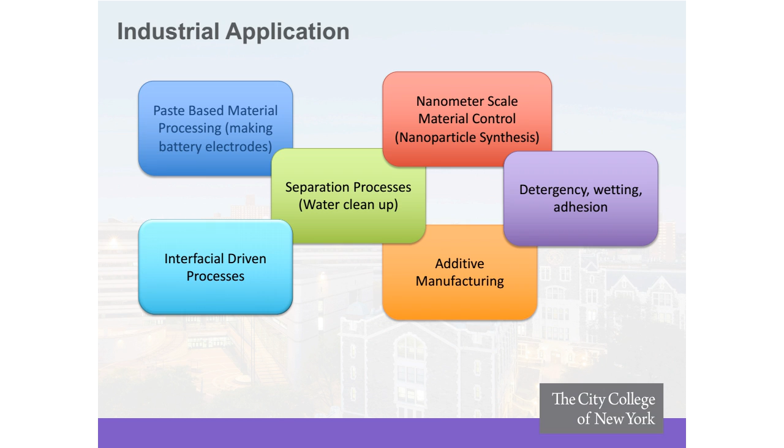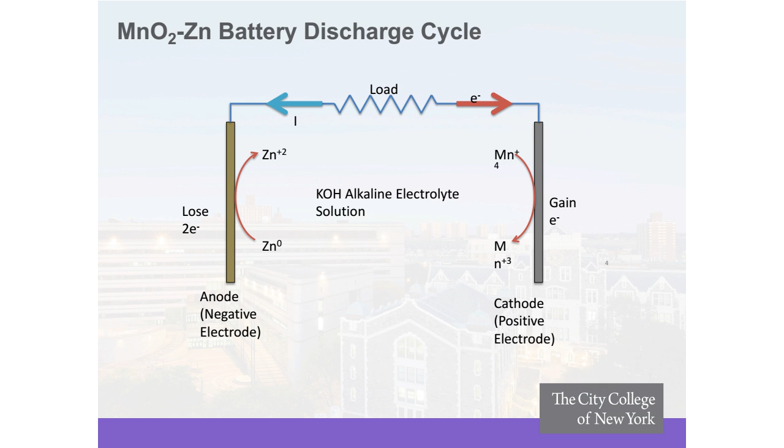In the first example that I've mentioned, we are focusing on batteries that are using the chemistry of the manganese dioxide zinc metal anode. In these cases, I'll focus exclusively on the anode for the purposes of this presentation. We basically have metallic zinc that upon discharge actually corrodes, oxidizes from Zn0 to Zn2+, and the Zn2+ species are actually soluble in the alkaline electrolyte that we use.

During charging, these species actually replate onto the anode by accepting 2 electrons, and they form metallic zinc again. These processes, while they appear to be very simple, are actually complex in the sense that we do not know what intermediate species adsorb on the metallic surface. We also do not know what the rate limiting steps for these processes are.

And at the same time, on the actual anode, there are other competing reactions, such as the electrolysis of water that generates actual hydrogen during this process. And so, in order for us to be able to increase the efficiency of the battery, we need to minimize the parasitic reactions, the electrolysis of water, while figuring out how to overcome kinetic or mass transport limitations during the charge and discharge of the zinc anode during the battery operation.

If one were to focus on the particulate nature of the zinc anode, one will understand that the zinc particles, as they undergo corrosion, actually only their surfaces corrode. And very much as a core shell model, the oxide surface increases in size and eventually dissolves in the electrolyte.

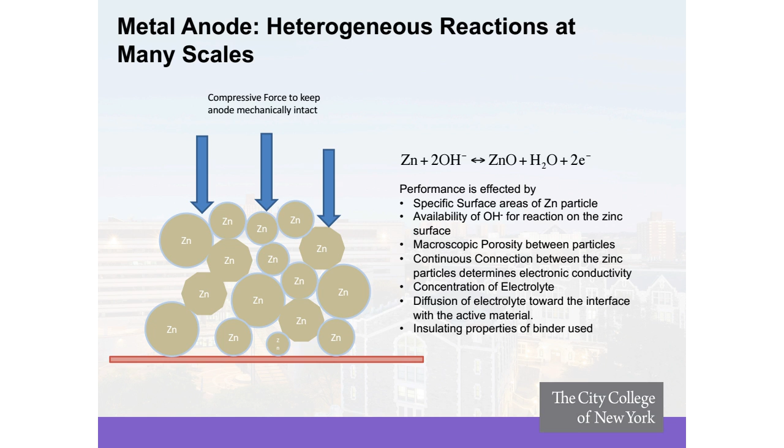Our motivation, thus, for this field is to actually build inks or materials that are representative of anodes or of the cathode material or even the electrolyte and the actual separator, and use 3D printing to allow us to print architectures of batteries where we've maximized the area to volume ratio so we can increase the power generation during the discharge of these batteries, and at the same time mitigate any type of transport problems that occur during the operation of these batteries. Furthermore, this allows for a much easier way to build batteries in unconventional environments.

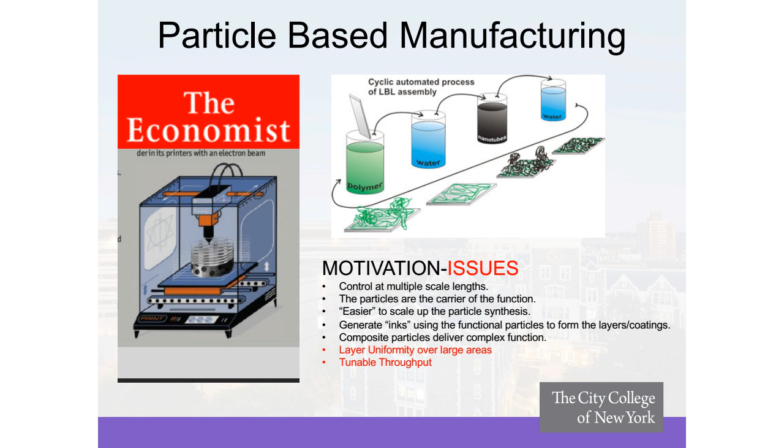Another area of interest in my research lab deals with the templating synthesis of materials and looking at different templating mechanisms. Specifically, we're interested in being able to use soft templates, such as liposomes or vesicles, where we can introduce these organic self-assembled structures to inorganic materials and synthesize using these organic layers as a template.

Such a particular example allows us to use a transcriptive synthesis where the vesicular or liposomal structure is used as a template to grow on the outside of that surface a very thin layer of a metal oxide, such as silica, and so we can generate hollow spheres.

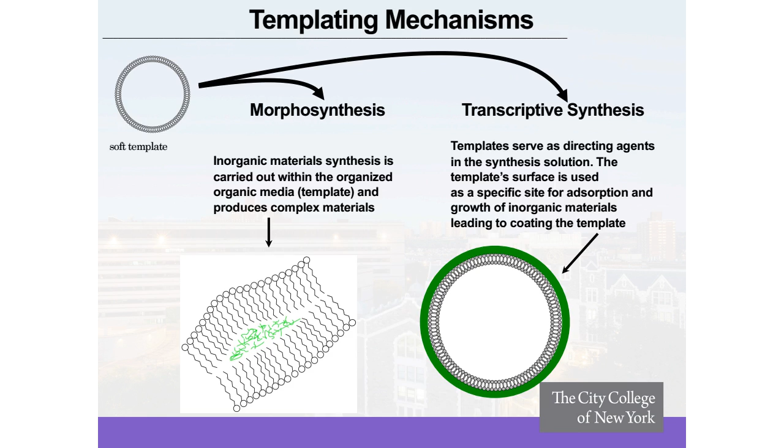By controlling the porosity of the shell, we can now have a scalable way of synthesizing hollow silica particles or other metal oxides, and we can control the exchange rate between the inner and outer domains by controlling the number density of the pores and the size of these pores. These pores again are templated by the presence of polymer chains that are incorporated in the actual vesicle wall.

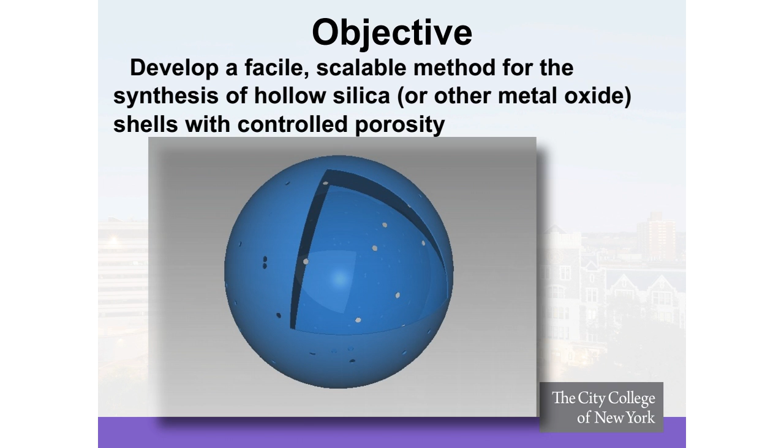Once these particles are formed, they can be assembled through a colloidal assembly process into thin films, forming colloidal crystals or basically colloidal membranes. The porosity through these membranes is controlled by the pore size of each one of these particles, which allows the diffusion or permeation of a gas or another species of preference through that material. Furthermore, we can functionalize the surfaces and the pore surface in such a way that we can also chromatographically separate out materials as they permeate through these colloidal crystal assemblies.

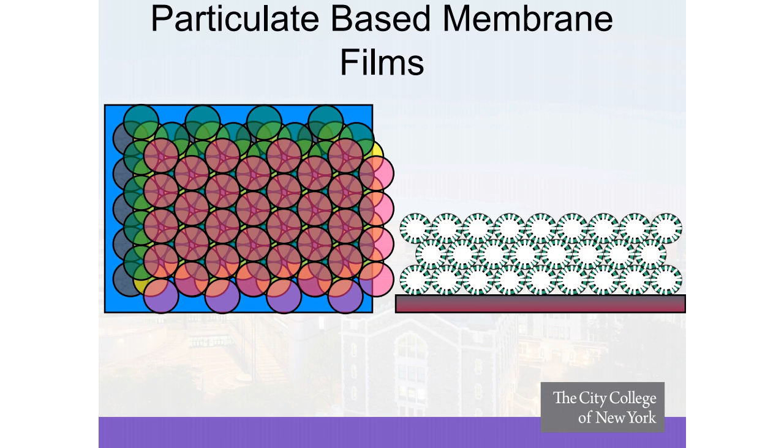Another approach where we can utilize wetting phenomena or selective interfacial interactions between a liquid or two liquids and a solid substrate is for the separation of oil and water using meshes that have antagonistic wetting properties. So, for example, if we have a mesh that is wettable by a water phase but not by an oil phase, then only the water droplets are going to be able to move through the mesh pore while the oil droplets will be captured, and one is able to phase separate water from oil quite efficiently.

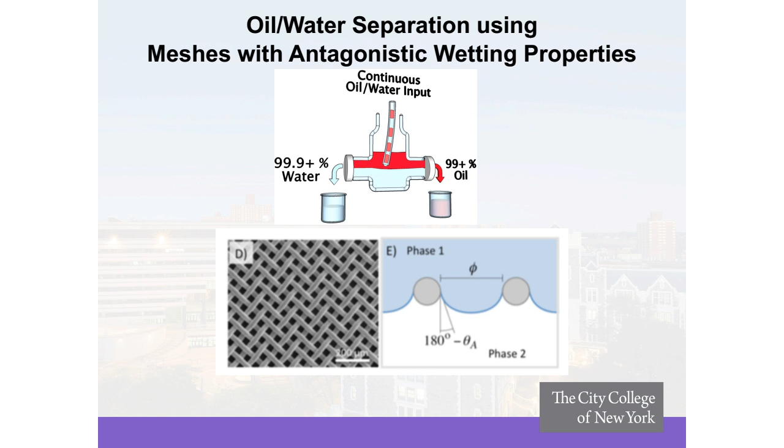Furthermore, the porosity and wettability of these surfaces is determined really by the microstructure on the metallic substrates or the actual substrates of the separator. So controlling that microstructure allows us to have surfaces that are either wettable by water or wettable by oil.

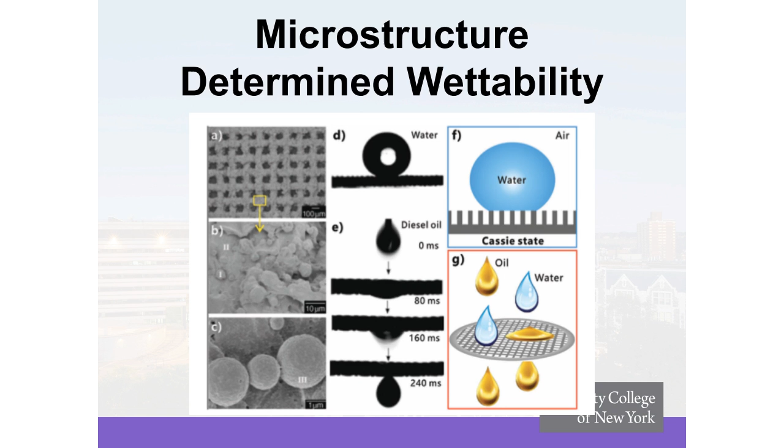The final project that we are very interested in the lab deals with particle adsorption on surfaces, and one can very easily understand the interactions that occur when a particle approaches a substrate. Whether it will adsorb or not depends on the specific interaction of the particle with the substrate. It will also be determined by the particle-particle interactions, the particle-solvent interactions and the strength of the solvent-solvent interactions. This set of 4 interactions pretty much determines the extent of adsorption of a particle onto a substrate.

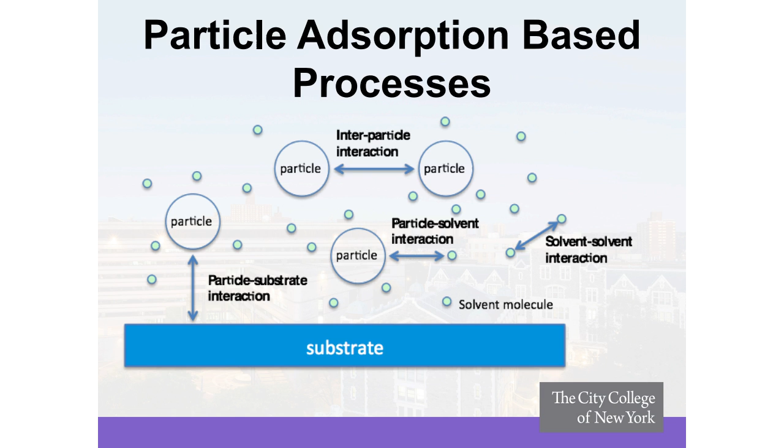As part of designing functional materials through these templated approaches, we've also developed techniques in our laboratory where we can not only form hollow shells, but also core shell particles where there is a core functionality, typically a metal in our cases, that is coated with a particular shell. And then these particles can be assembled onto substrates using approaches where we tailor those 4 interactions mentioned.

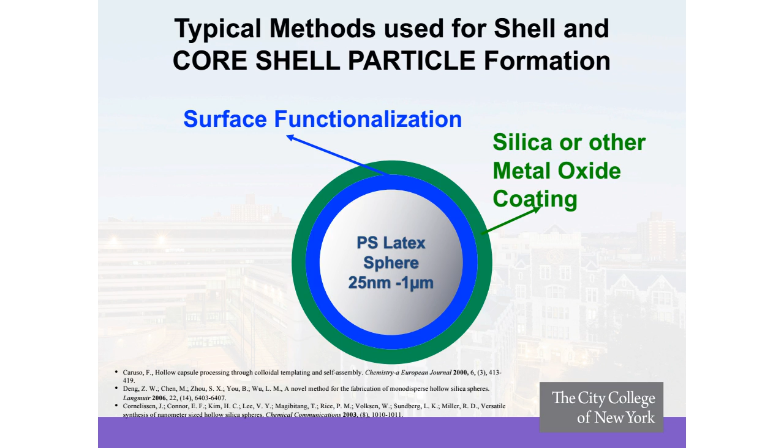Specifically, the material that we have been looking at in the lab is a silver core that is a conductor and can be used either as a catalyst or as a herbicide or a bactericide. We're using a silica insulator shell that also can be a titania shell. It could also be a zirconia shell. And the combination of the two allows us to generate a metal dielectric composite.

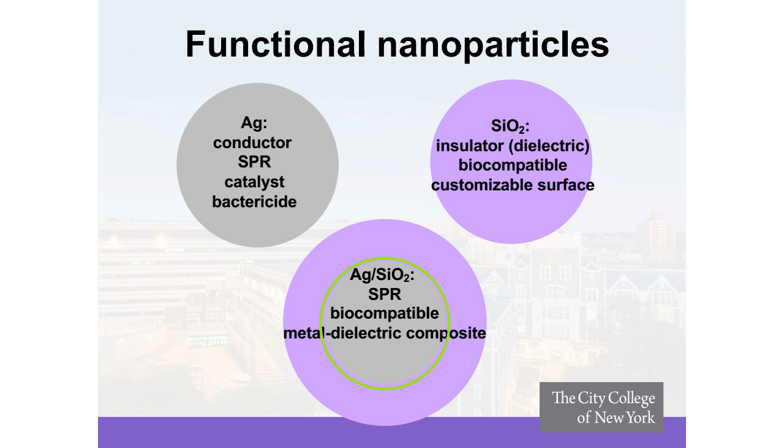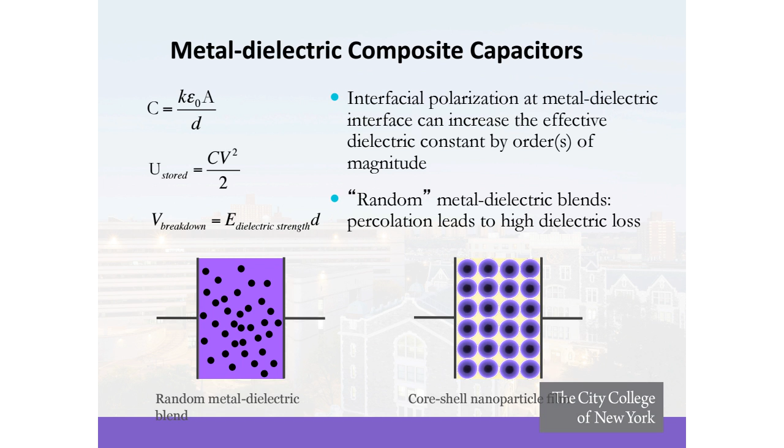We can use these metal core dielectric shell particles to form thin layers of very high dielectric constant materials for the purpose of fabricating high efficiency capacitors. The presence of the metal core in these particles allows for a very high polarization at the metal dielectric interface that increases dielectric constant. And because the dielectric shell prevents percolation between the metal cores, we end up with materials that have very high dielectric constant.

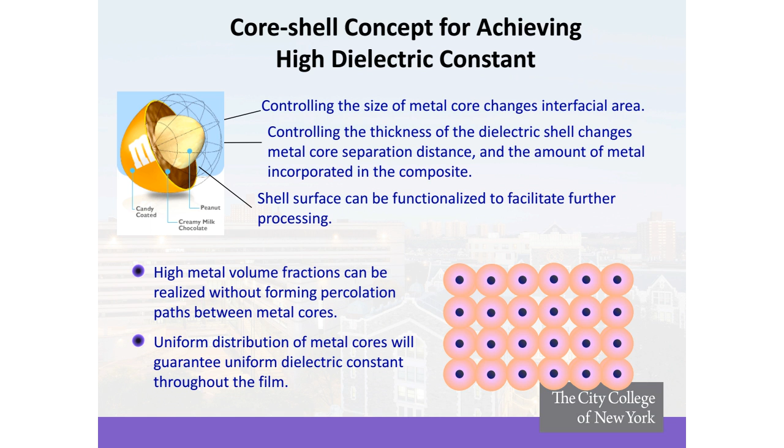So one can think of these cases where we are building, in essence, peanut M&Ms, the peanut being our metal core, the chocolate being our dielectric material, and the color of the candy is the surface modification that we functionalize each particle with. The ability to functionalize each particle allows a very straightforward way of arraying these particles onto a substrate using interfacial electrostatic interactions.

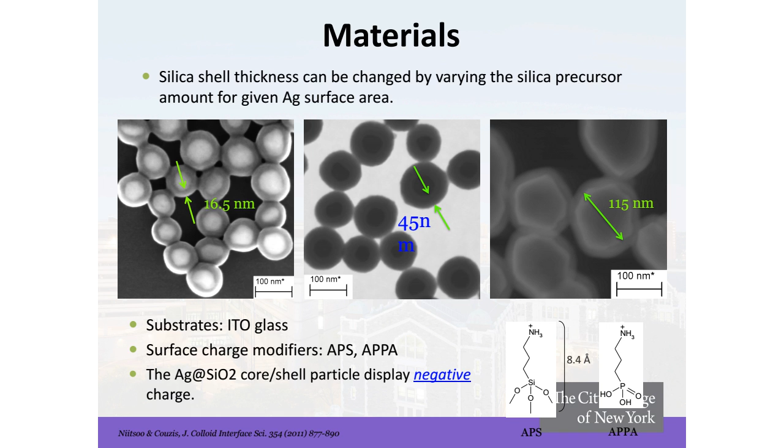This is a picture to show you that the process is quite robust, and we've been able to scale these core shell manufacturing processes. We can have cores and shells in the range of 16.5 nanometers all the way up to 115 nanometer total diameter of the particle, and we've learned how to build large enough quantities of these materials so that we can overlay hundreds of layers of these colloidal particles onto a substrate to form macroscopic capacitors, where we can now measure the performance of the device.